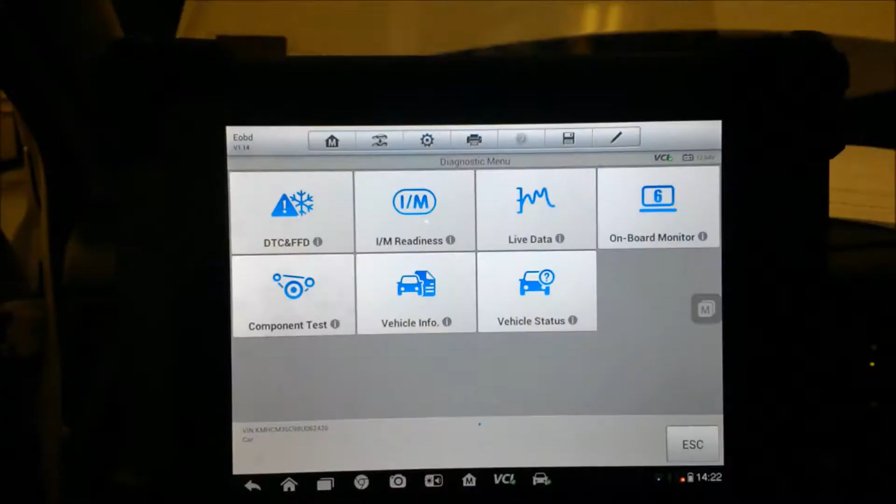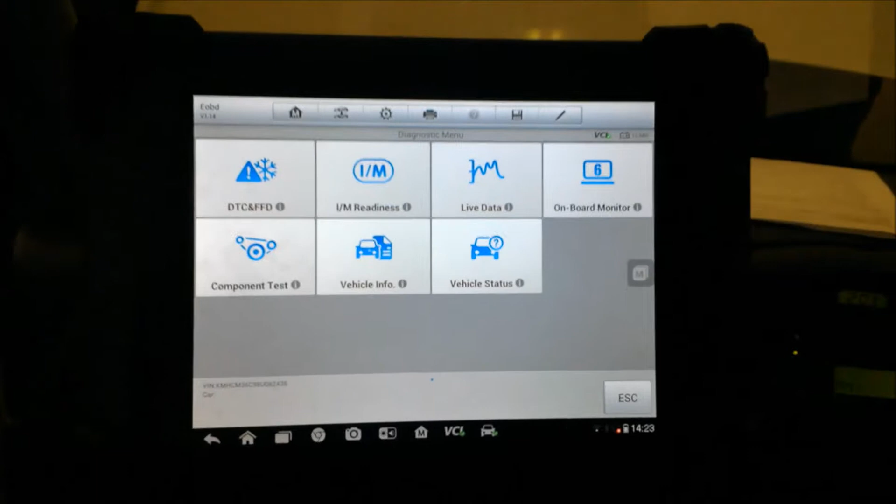Okay, so here we are with our scan tool. You want to select live data once you've put all your information in for your car. This one here is a 2009, I think, or 2007 Hyundai Accent. So I'm going to go ahead and go to my live data.

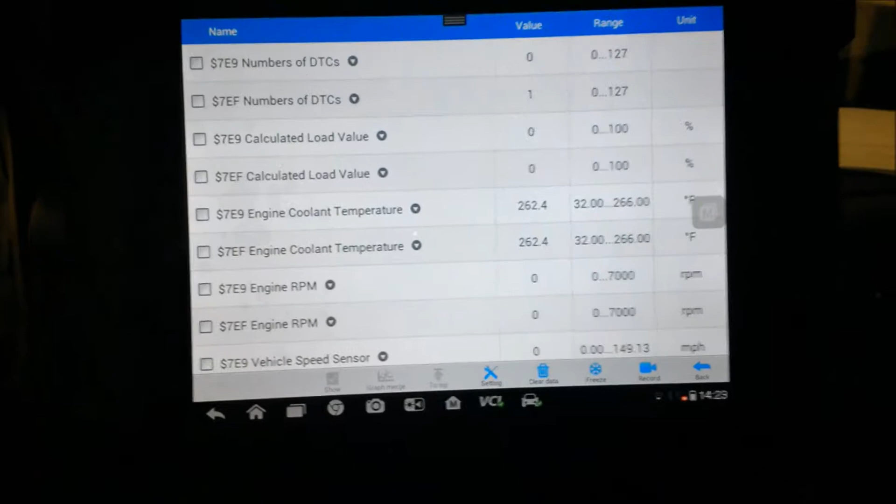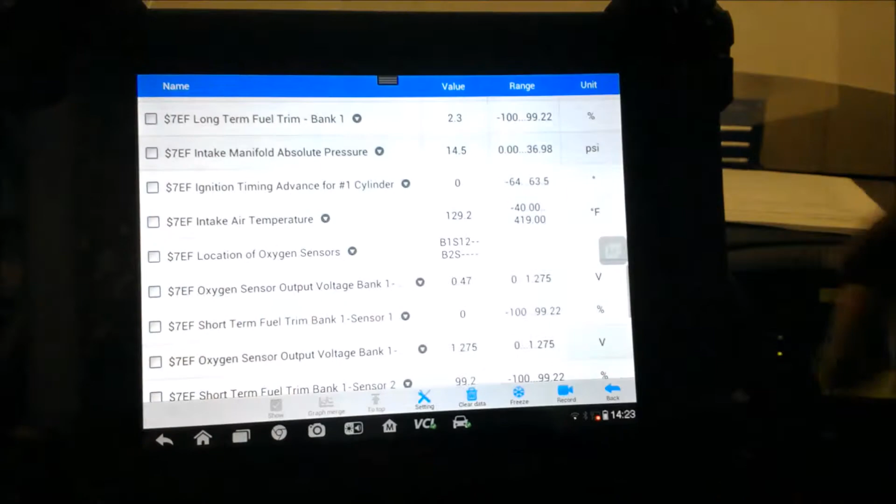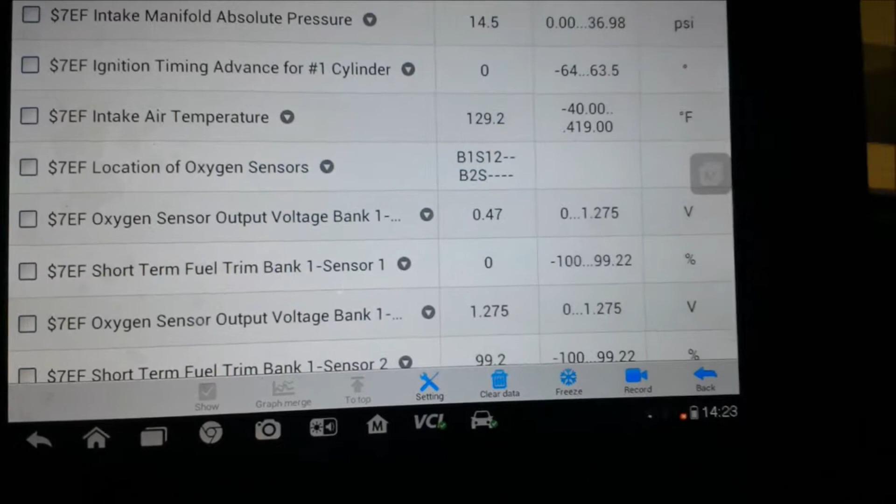And we are going to look for our voltage right here. So we're going to look at this right there where it says oxygen sensor output voltage bank 1. We're going to look at that one. I'm actually going to make that one into a graph.

Alright, so right now with the car off, that is our base signal voltage, and that's a signal that's sent to the ECM to let the ECM know that it's receiving voltage from the O2 sensor. So now we're going to go ahead, we're going to start the car.

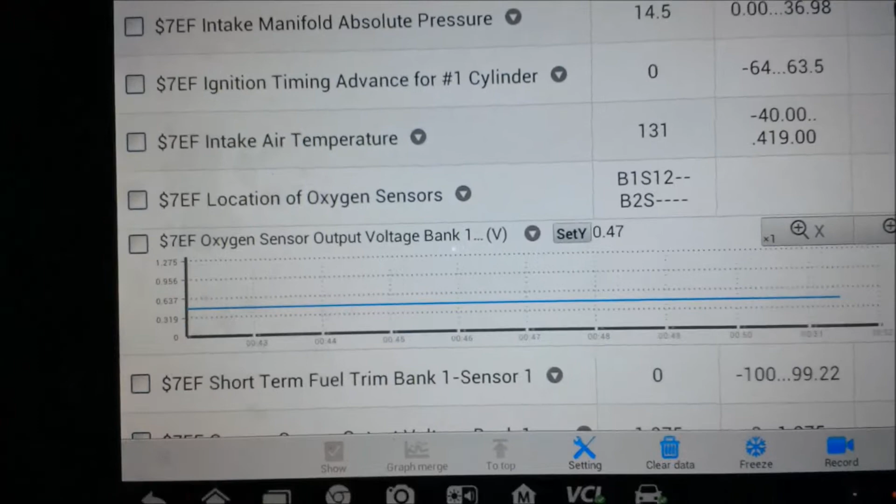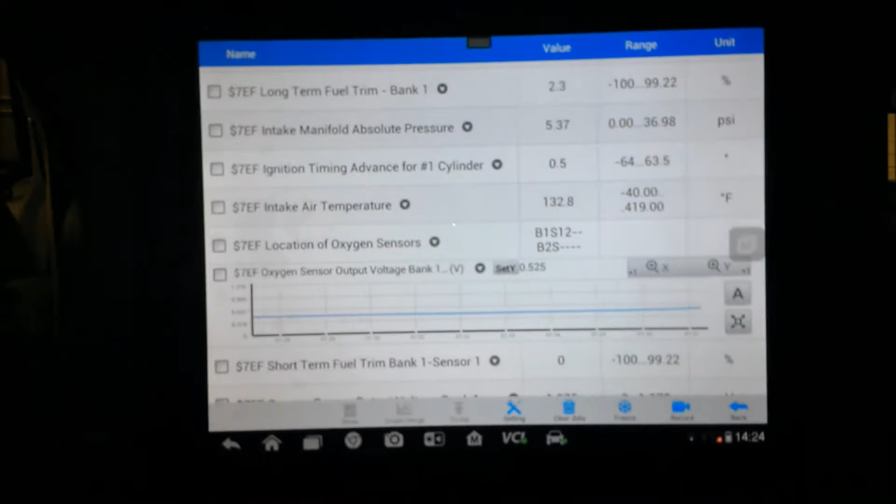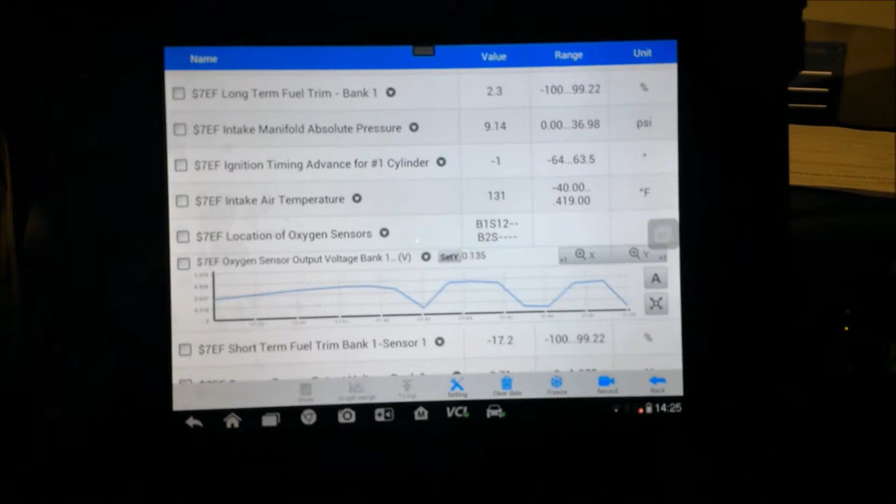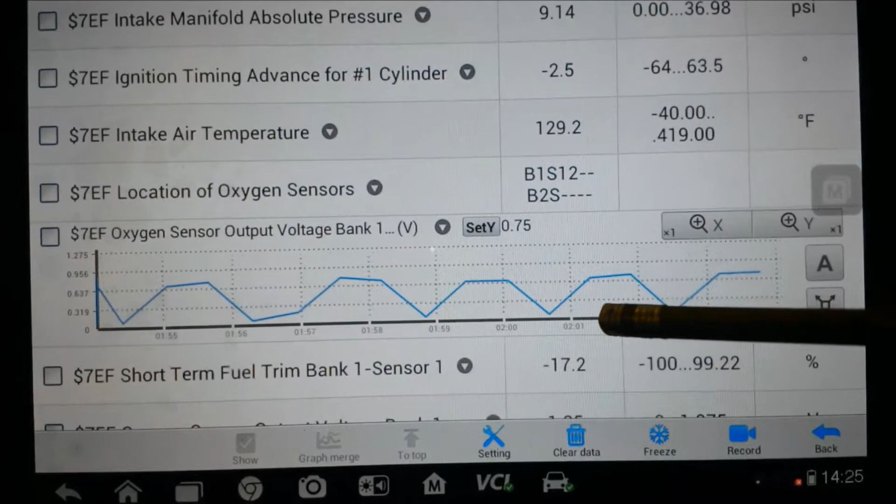Okay. Now, this car's been running for a little bit, so the O2 sensor is already hot. So we should get a reading a little bit sooner. Now, what we're looking at on this chart is for this to not be way up here and just reading a flat line, or way down here and reading a flat line. We want to see this good up and down waveform like this, so that we know it's making adjustments where it needs to.

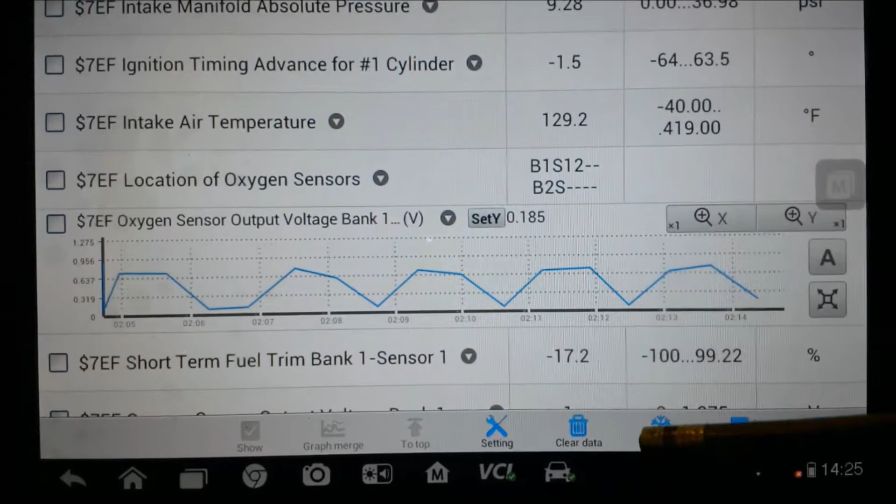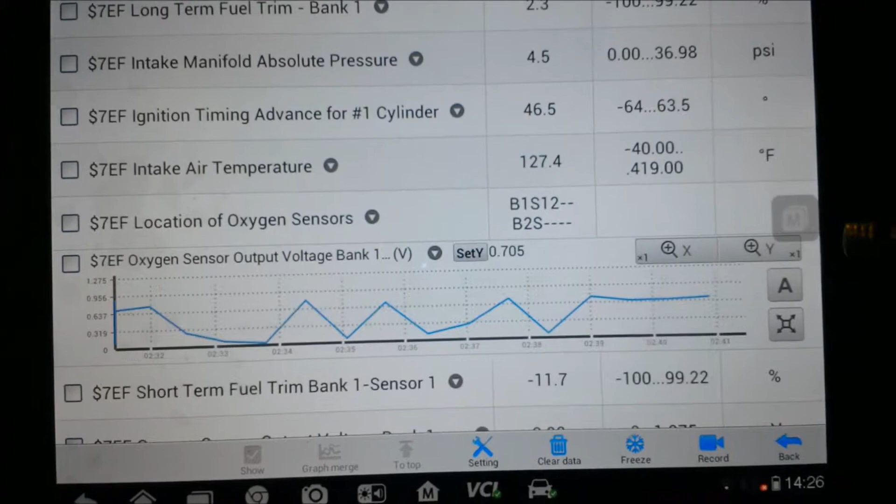If we look at this bank 1 sensor 1 here, the percentage -17, -11, that means that it's taking away fuel. So right here you can see where it's taking it away. Every time this goes down, it's taking away fuel. So once it starts to run a little rich, if I hit the gas, you see how it goes very low, then comes back up.

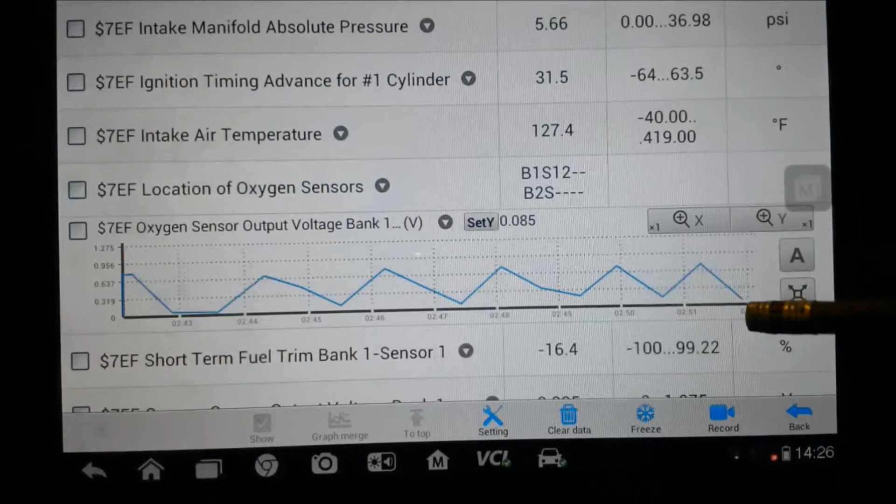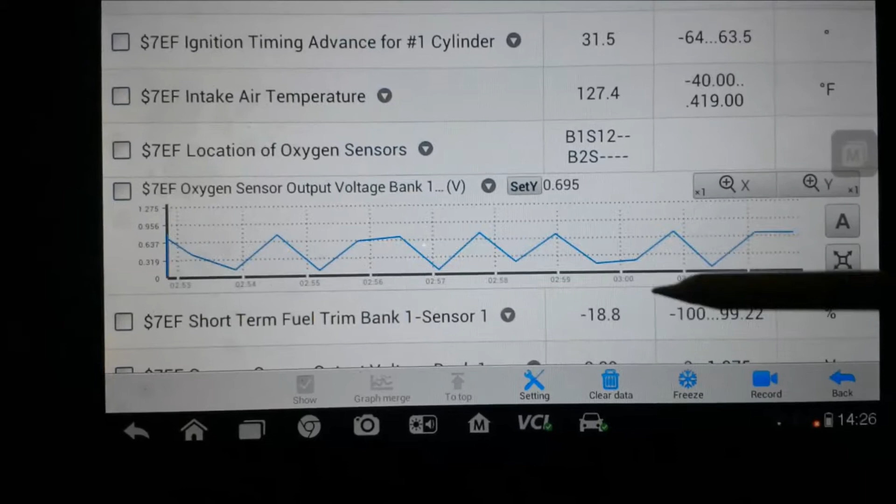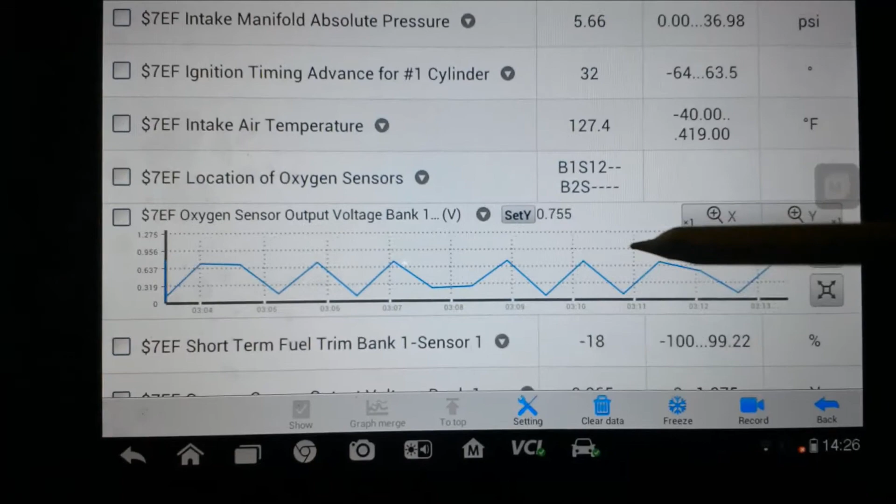Alright. And we're going to want to watch this for 10 variations to make sure that our O2 sensor is actually working correctly. Right here, I would say that's a totally functioning O2 sensor, just because of the fact that it isn't rich biased or lean biased. If it was lean biased, it would be down here, probably below our signal voltage, and if it was rich, it'd be way above our signal voltage, which our signal voltage was right about here.

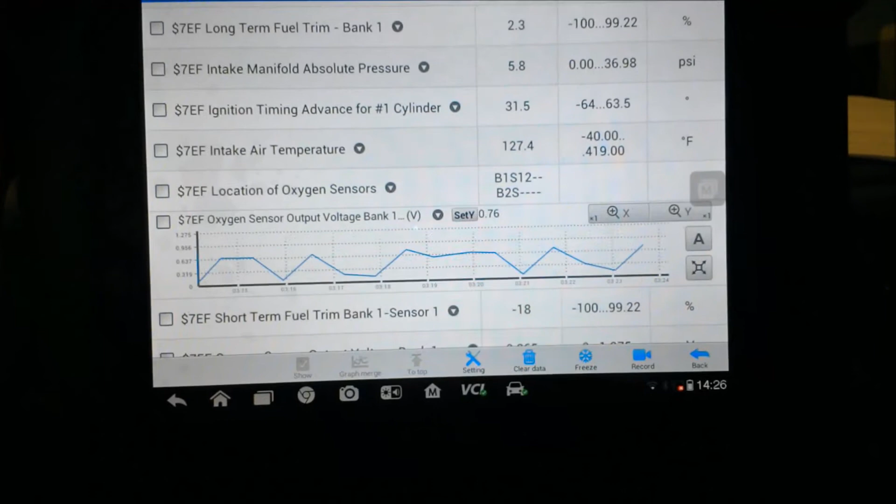So that is how you read the graph for the O2 sensor, and that's also how you would check to make sure that you have a properly functioning O2 sensor.